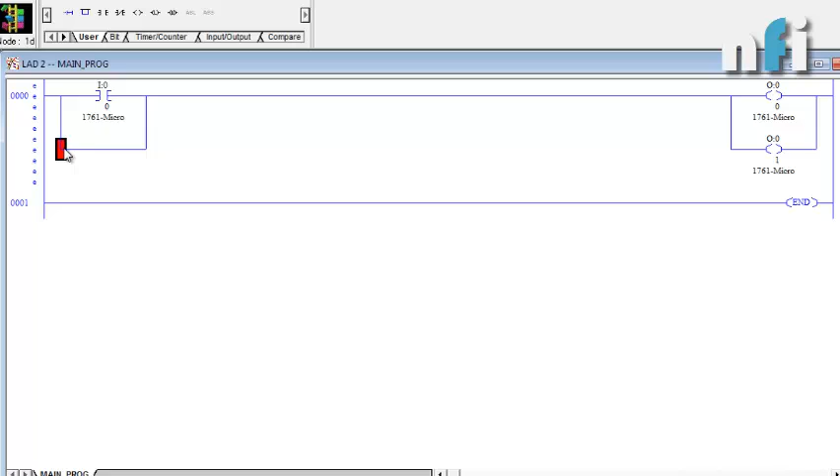So for that we do not require this I3 here. So we'll remove that. Also remove this output. Sorry, we'll remove this parallel rung. And now instead of this output O0, we'll use this latch, right? Output latch, because this is the special bit which will turn on the outputs and the output will retain its state. So we'll remove these outputs.

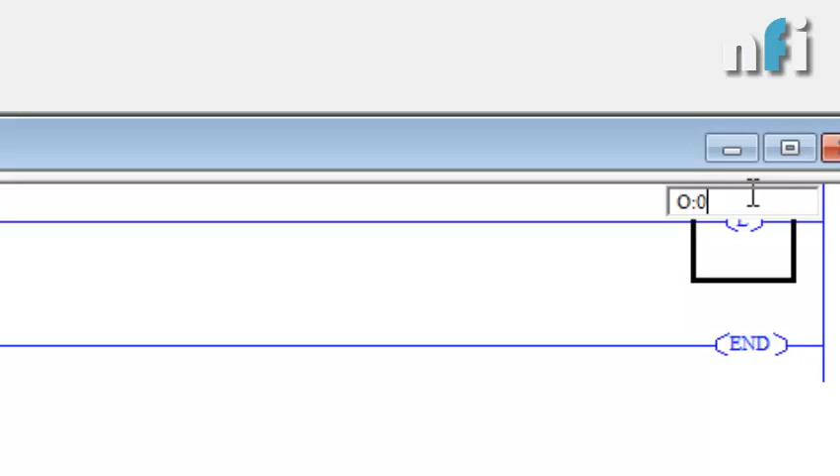Now instead of that, let's take latch. Now here I'll enter the same output address, O:0/0. This is my output 0. Then I'll take another rung here and I'll add another input, which is I:0/3, and this I'll be using to unlatch this output. So for that I'll use this bit, output unlatch. Alright, and I'll use the same address.

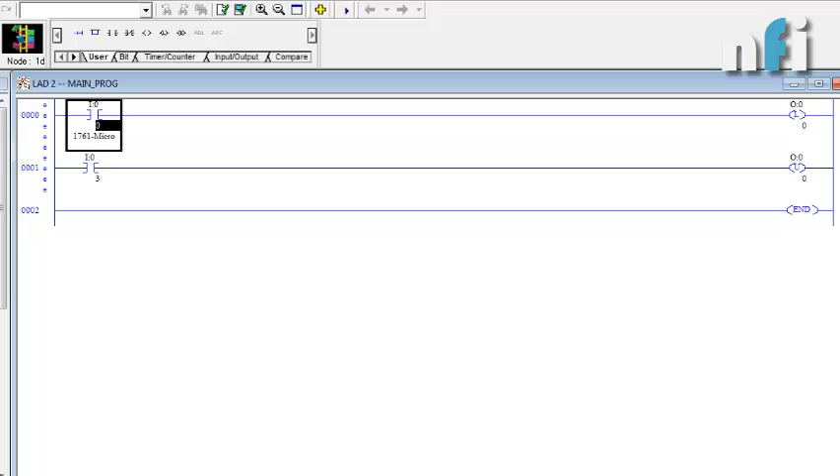This is analogous to the set and reset command, which we can do in Delta PLC. Similarly we can do it in Siemens also, but this is latch unlatch here. Latch means it will retain the state if this input is on, and unlatch means it will turn off the output if this is energized. So let's see how this is working. So I'm going to download this program.

So let's see now by pressing IN0 just once. I'll just press it and I'll release it. Now you can see that just by giving a pulse, this is latched. So this latch bit just needs a single pulse, which can be of any small duration. In microseconds this can be turned on, and to unlatch that I have to press this I3. So I'm pressing this I3, which will unlatch the output.

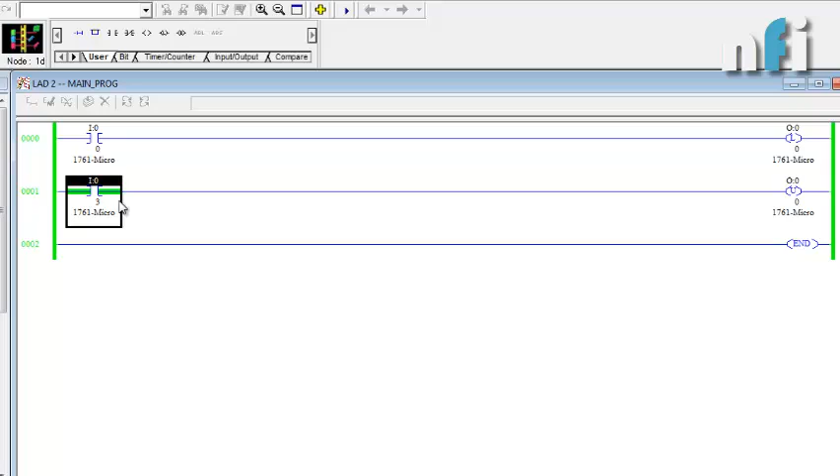So this is quite easy, that makes sense. So this I0 is again going to latch this, and I3 is going to unlatch this. Again latch and unlatch. So that is a very easy way to do this program by using the latch and unlatch bit. Now with this command we can also do interlocking. If you remember interlocking, in which we interlock two outputs using two inputs. So let's interlock output 0 and output 1.

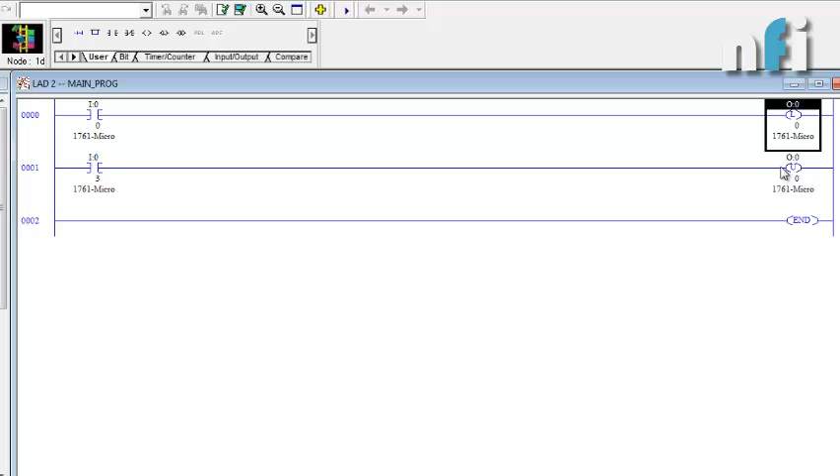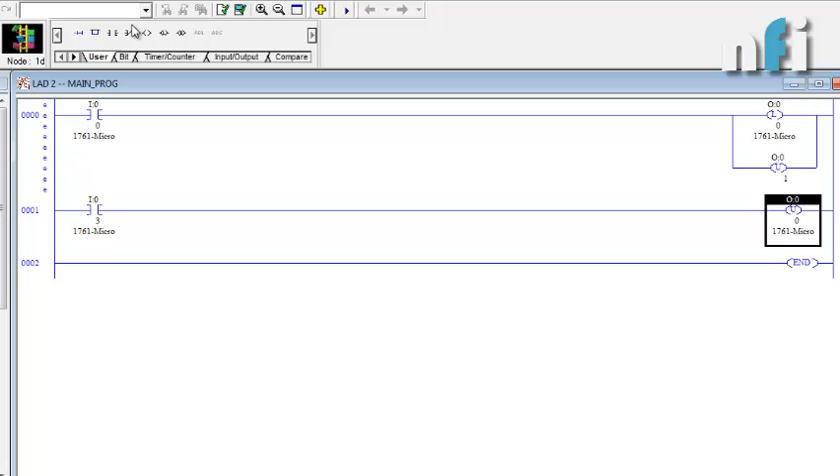So in parallel to that I'll take another output like this. Now here, this is latch, I'll take unlatch here, because interlocking means when one is on, another is off. This is my second output. Now here the first one is unlatched, the second one will be latched. So here I'll take latch and I'll copy the address of this output.

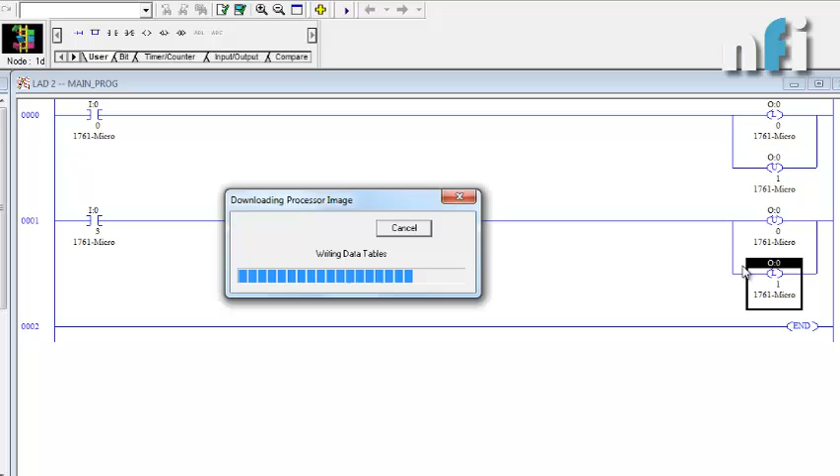That's it. So this makes my interlocking circuit, in which if I press the first button, one output will be latched, another will be unlatched, and if I press the second, it will be latched and the first one will be unlatched. So at the same time both outputs will not be on. So you can see here, the first output is on, you can see in the PLC itself, and this makes the other on. So by using two inputs, one output is latched, another is unlatched, so this is interlocking. That's how it works.

So this was about latching and unlatching using special bits, which are the latch and unlatch bits. You can use both ways, you can use the earlier way also, but this is suggested because it makes the program flexible. If you are doing a very complex program, this makes it very easy to work. So that was about output latch and output unlatch. These are concepts we widely use in programs.